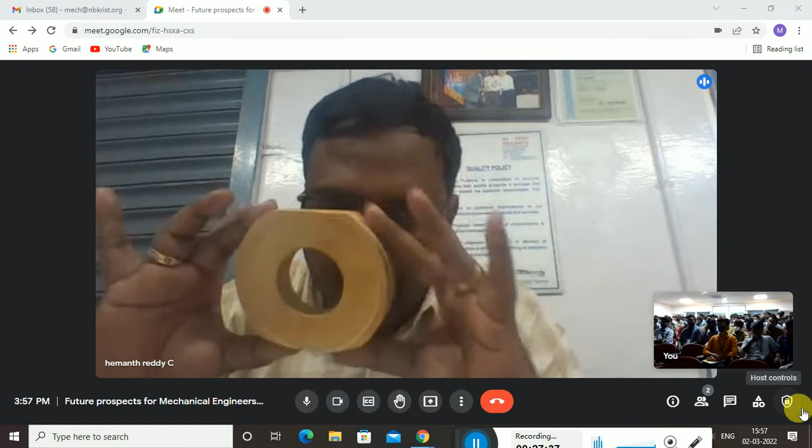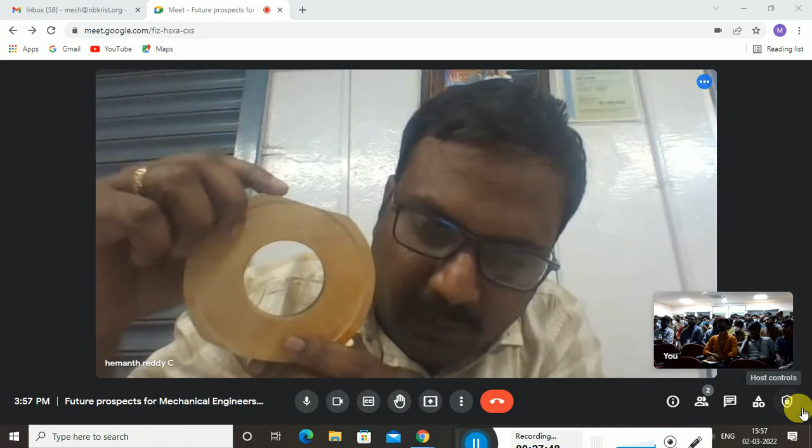This is an ablative ring which will go into a nozzle called HS200JM nozzle. This ablative ring is made up of silica. Silica fabric is impregnated with phenolic resin. What we do is form the layers. If you see here, these layers are formed, finally forming a product.

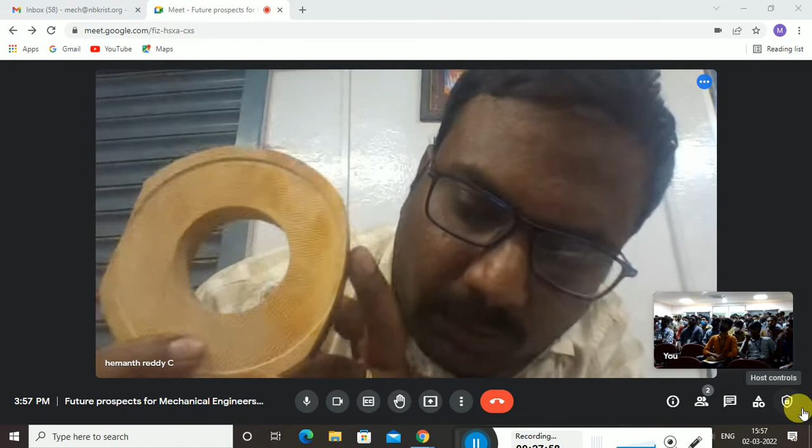Similarly, this is called a silica ablative ring, made up of silica fabric and phenolic resin. Now I will show you another one which is made up of carbon.

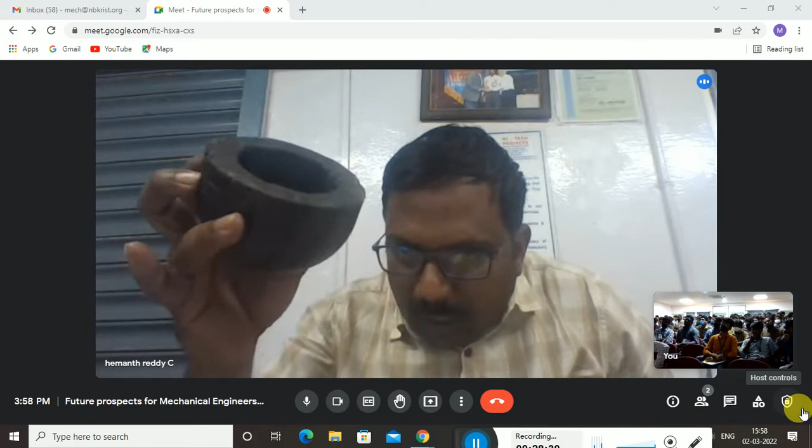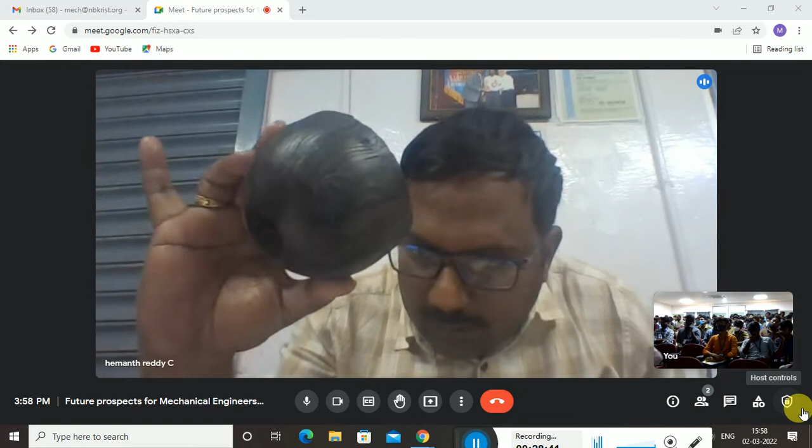You see, this is a carbon liner. Carbon liner, carbon fabric, totally made up of this carbon fabric, impregnated with phenolic resin, and laid on the tool. So we have pressed the male and female mold. This is called matched die molding. I hope you might have learned this tool design.

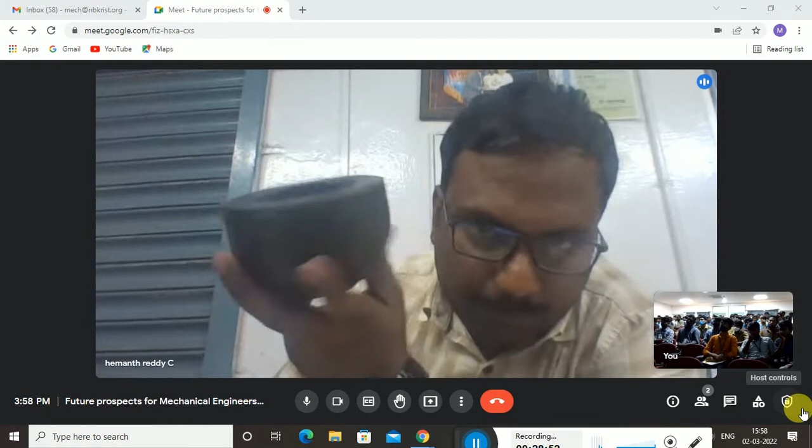So what we do is take it and machine this. Right after machining, we are going to bond it to the metallic hardware. At the same time, I would like to show you the NDT machine which we use for UT test, Sonatest make.

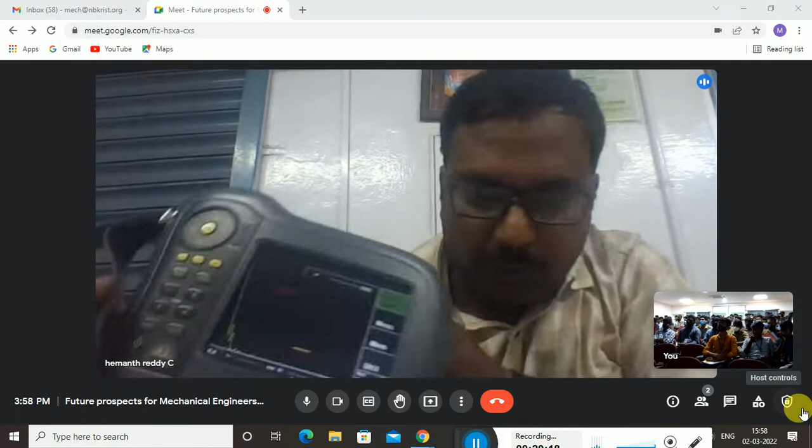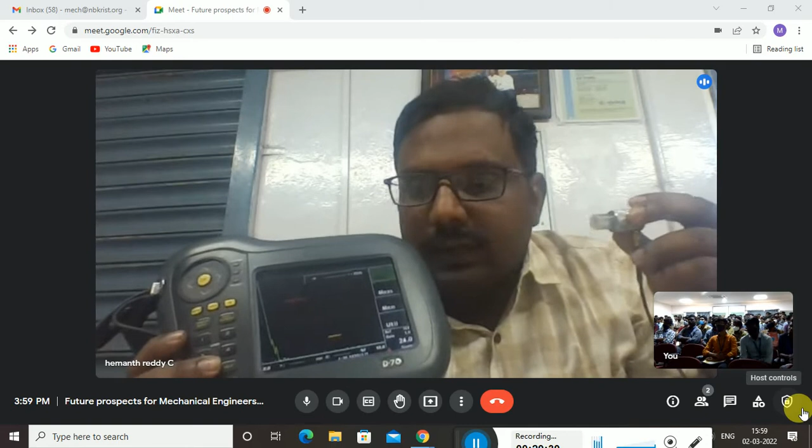If you are able to see, this is a UT machine where our people will find out defects on this liner with the help of probes. Electrical pulses will be converted into sound waves. These sound waves we can see here. In case if any defect is there, these sound waves will not pass. So with this UT machine, we are able to do ultrasonic testing.

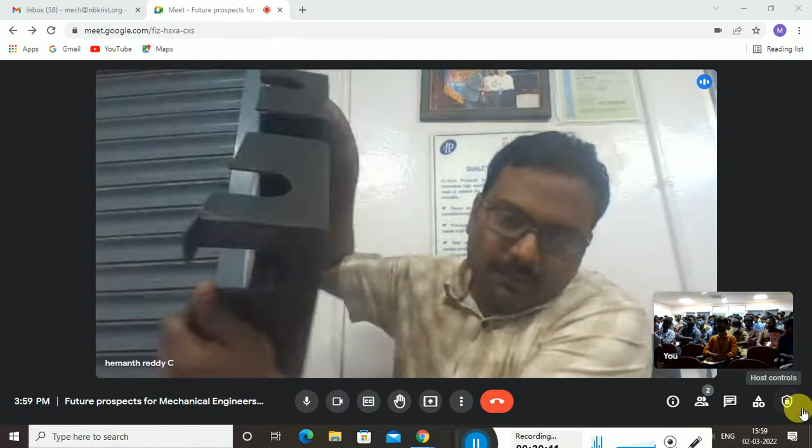This is made up of carbon prepreg, unidirectional prepreg. So, do you know the cost of this? Do you know the cost of this product?

Carbon material cost is 25,000 per square meter. For this, nearly 12 square meters are required. And for processing this, we are charging 2.5 lakh. You count the product cost.

And this is the disadvantage in composites. The cost of the composite material is high. Cost of the composite material is very high. That is the only disadvantage. But a lot of R&D is going on. Slowly, they are going to cut the cost also, and slowly it will be available to all the people.

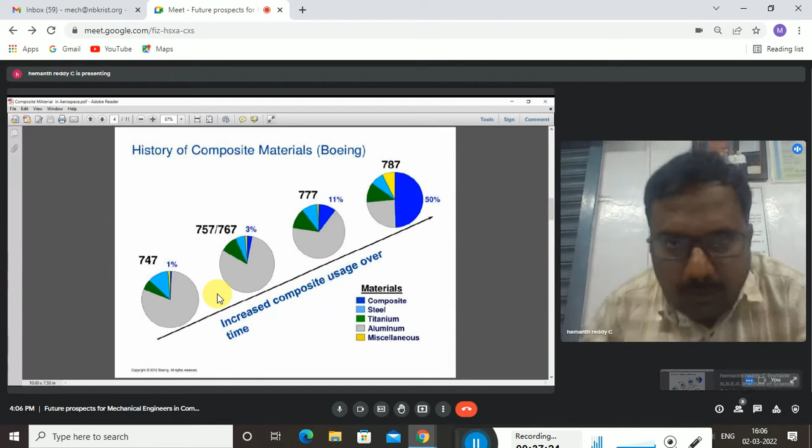Now it is the history of composite material. There is a blue line, the blue color indicating that in 747 only 1% they use.

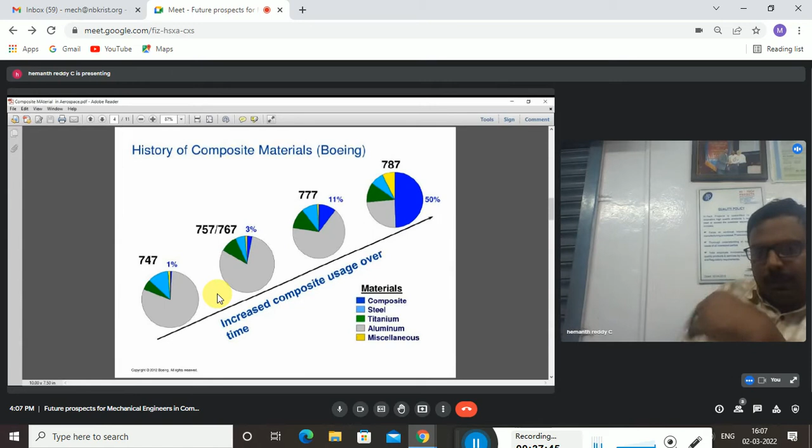So in 757 and 767, it has been slightly increased to 3%. And 777 Boeing, 11%. 787, 50%. So that means the composite usage has increased from the initial perception to right now.

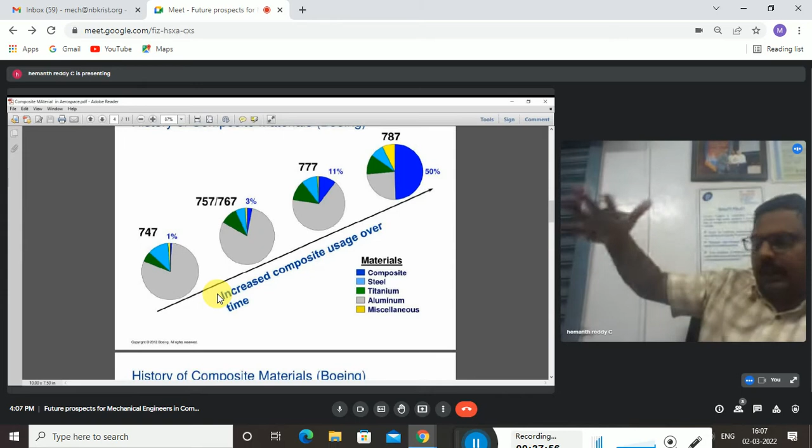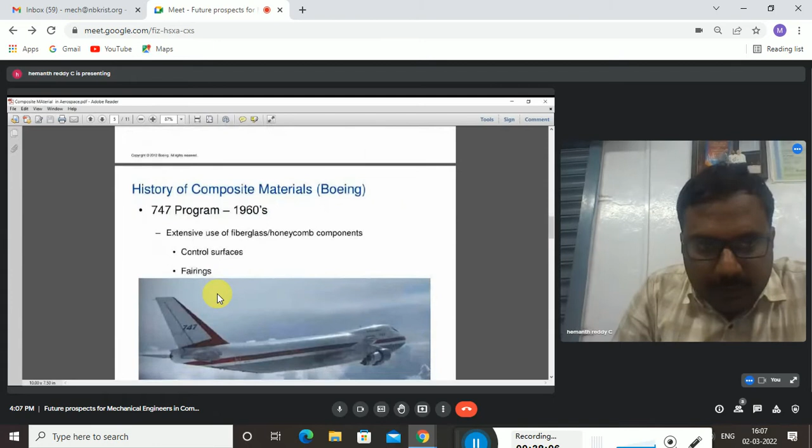And so a lot of R&D is going on to replace the remaining materials with composite also, because of being lightweight. See, in 747, what they used is fiberglass. Here there is a honeycomb material.

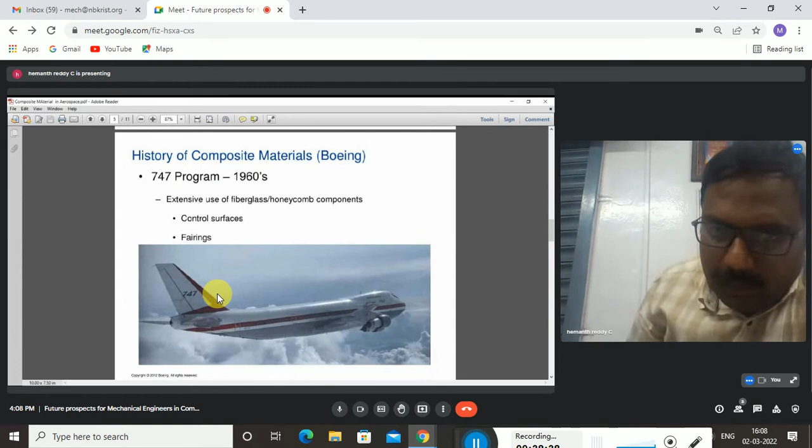Why do we use this? See, there is a sandwich material, sir. I would like to tell everybody that in composite, sandwich material is also available for thickness. What we use for strength is a sandwich material kept in the middle, and the outer layers will be fabric layers. It gives thickness, and also electrical properties are there.

We also manufacture radomes, which are protective covers for the antenna. These radomes, why we use them, is the antenna should be protected because it is exposed to the environment. When it is exposed to the environment, we are protecting it by using these radomes.

When we are placing a cover onto the antenna, it should not disturb its functionality.

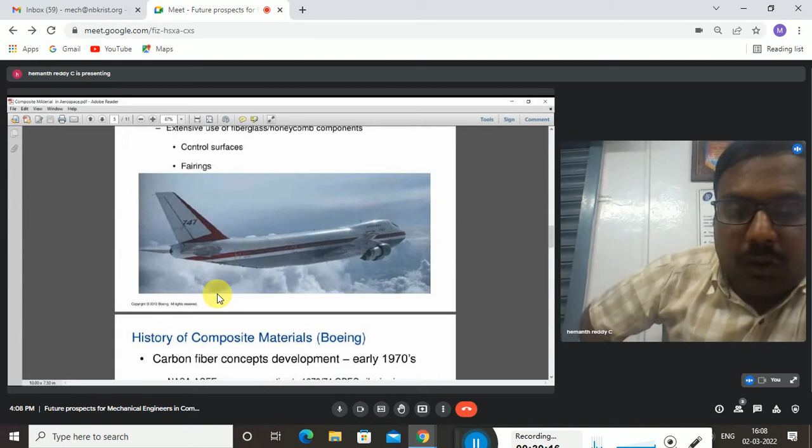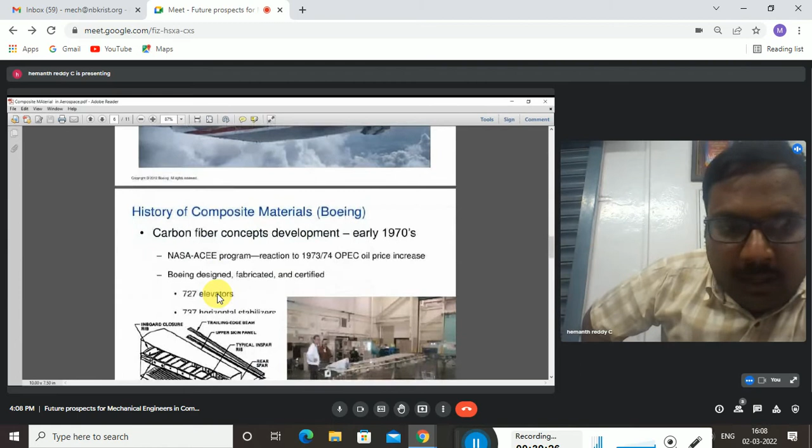So now the carbon composite concept came in the 1970s. Initially, NASA people started it. They started with one program, the ACEE program.

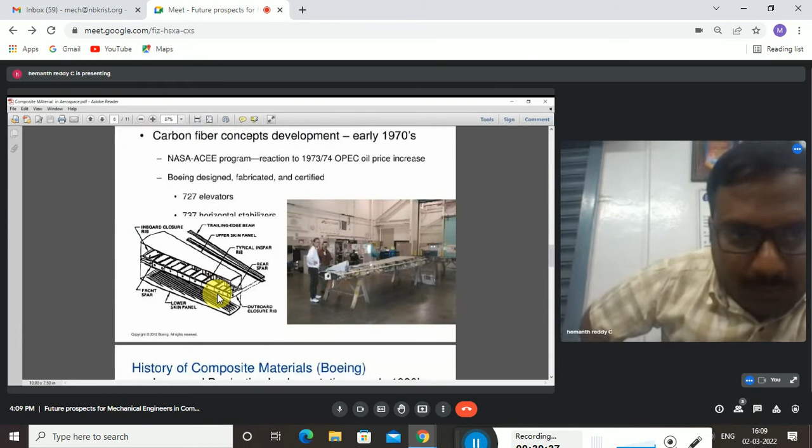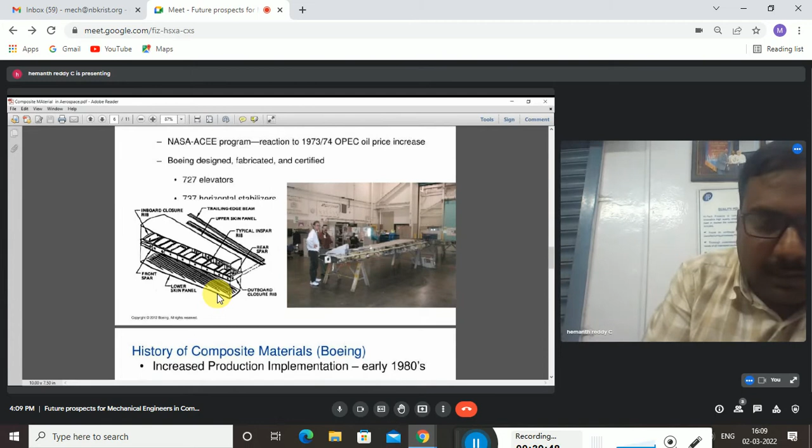So slowly, with the trailing edge beam, upper skin panels, they started manufacturing, replacing the previous fibers, glass fiber, with carbon. And these are all the indications we have given.

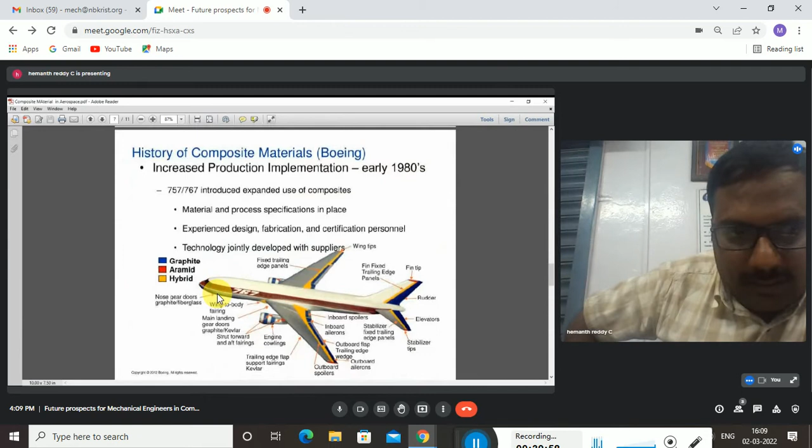And production implementation came in the 1980s for Boeing 757 and 767. Here you can see the parts, engine cowl. Now engine cowlings are totally replaced with carbon.

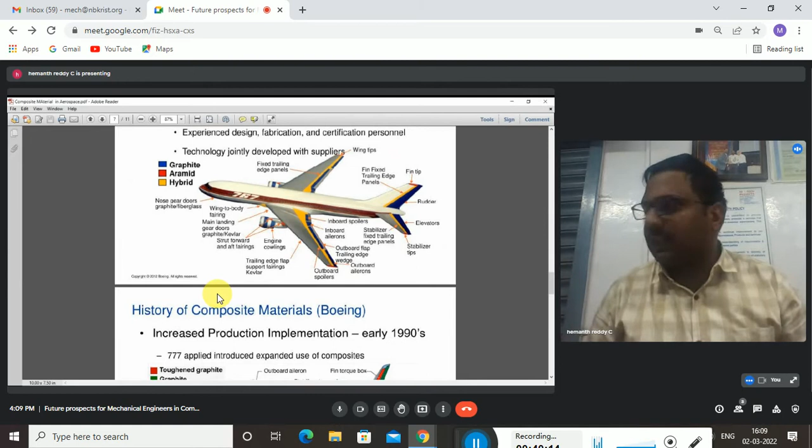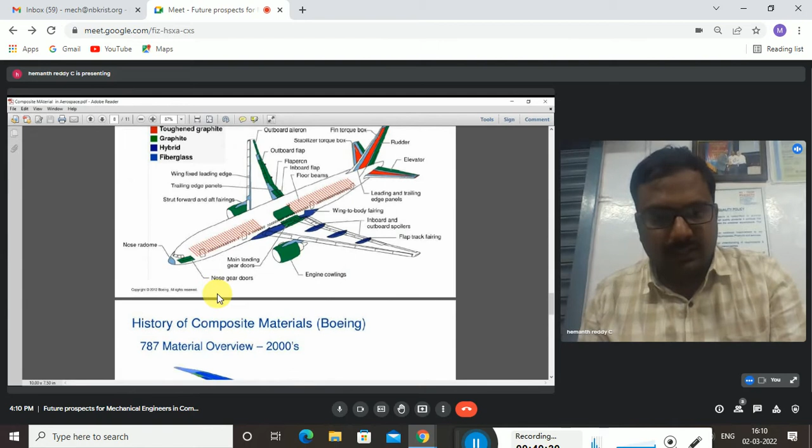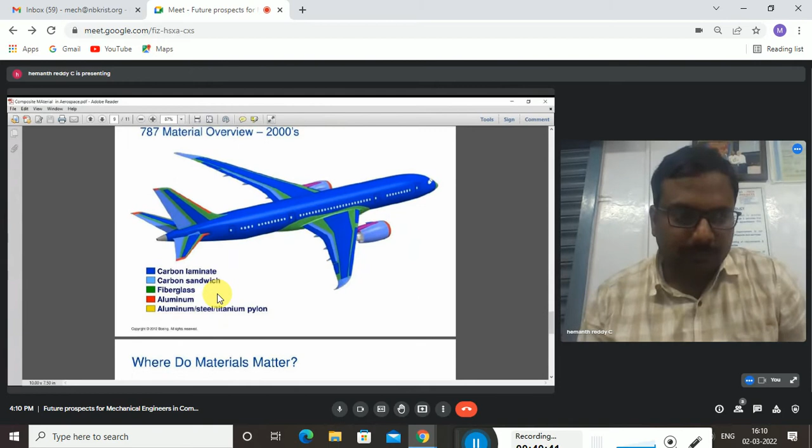So in the 1990s, wherever this green color is there, it's nothing but graphite, whereas hybrid combinations of glass and carbon are also there. So now if you see in 787, this blue color is totally replaced with carbon. You can see here.

See where these materials matter, where we are using them - so everywhere we are using them in aerospace. What is the reason? I will tell you. If you take an aircraft or aeroplane, airframes in the sense wings, related to flying, landing gears, all these things are made up of advanced materials only.

And interiors, now the seats are also totally - seats, overhead bins, linings, bulkheads, cargo restraints, floors, everything are totally replaced with composite because of high strength and less weight.

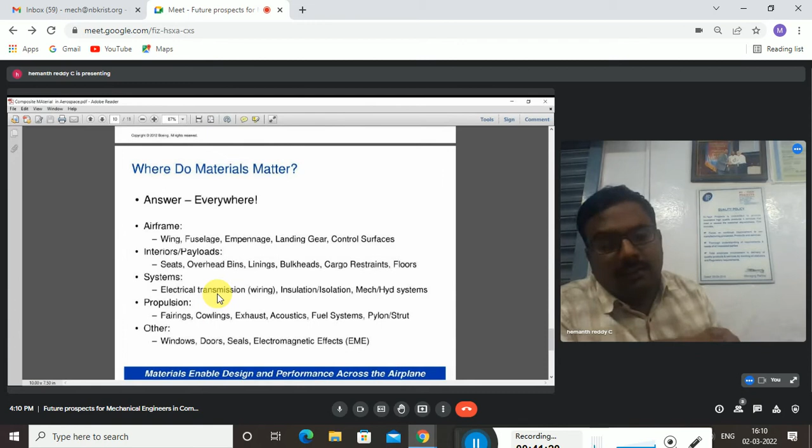And in the propulsion area, I have been telling about fairings, cowlings, exhaust, acoustic. Why do we use carbon material in the propulsion area? What is the reason?

Because propulsion is nothing but oxidant and fuel that it takes. So when we burn that fuel, automatically 1000 degrees or 1500 degrees Celsius temperature will be there. There should be a material to withstand that. If you use metal, what will happen? Automatically at a few hundred degrees Celsius, melting will occur.

But at 1000 degrees Celsius, if you use carbon material, or any advanced composite material, even Kevlar, the melting point will be at higher temperatures. So that's why carbon material or composite material is totally used wherever propulsion is there.

I would like to tell you, 90% of the material in the rocket launch, the composite material only will enter into the launch. The reason behind it is propulsion. 400-ton oxidation will happen.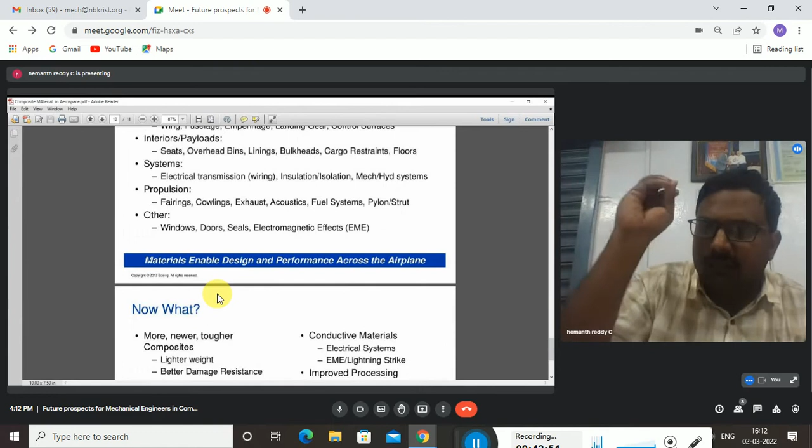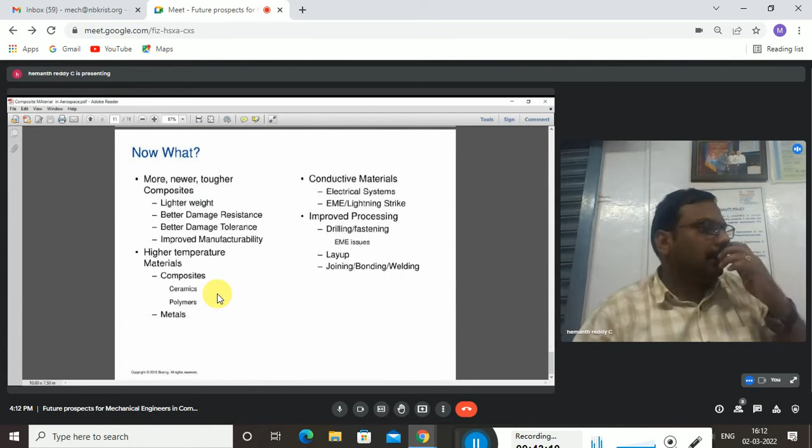So here are the advantages: lighter weight, better damage tolerance, and manufacturability will be improved. It will withstand higher temperatures. Because of all these reasons, this material is used.

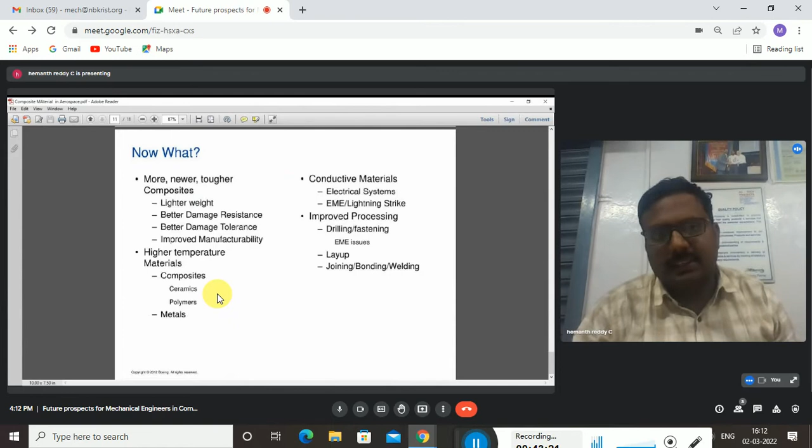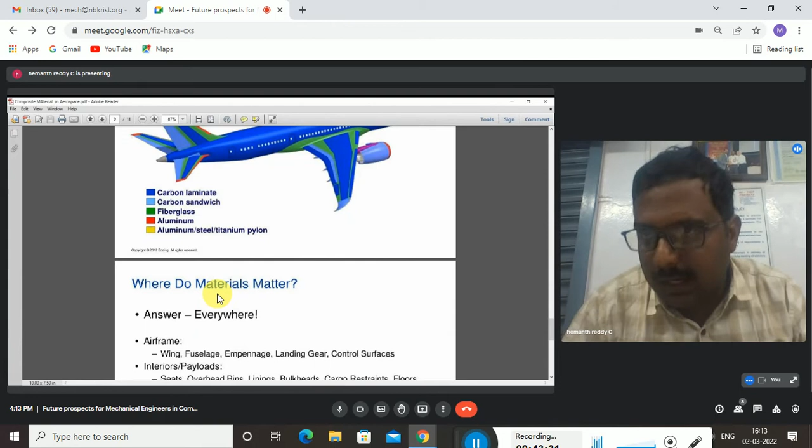And I would like to show one more slide also, what exactly at high tech what we are doing, and what facility we have, that also I would like to show you.

And I would like to show our high tech facility, what we have and what we have supplied.

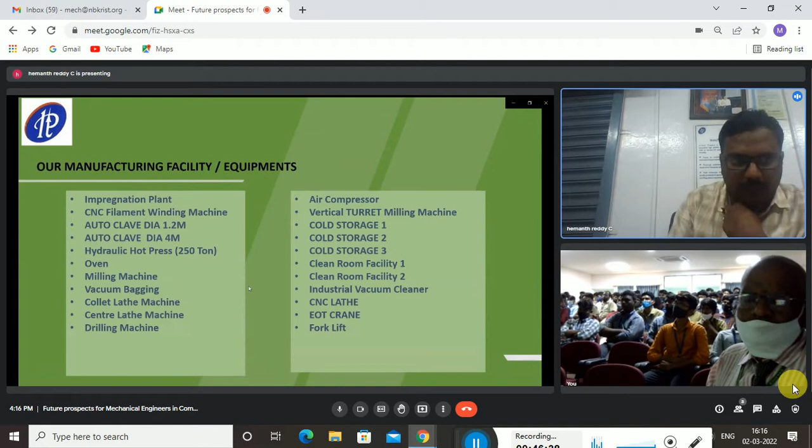Our manufacturing equipment: impregnation plant, we have filament winding, we have autoclave, we have hydraulic press. You can see the plant where we impregnate the carbon and silica fabric with phenolic resin.

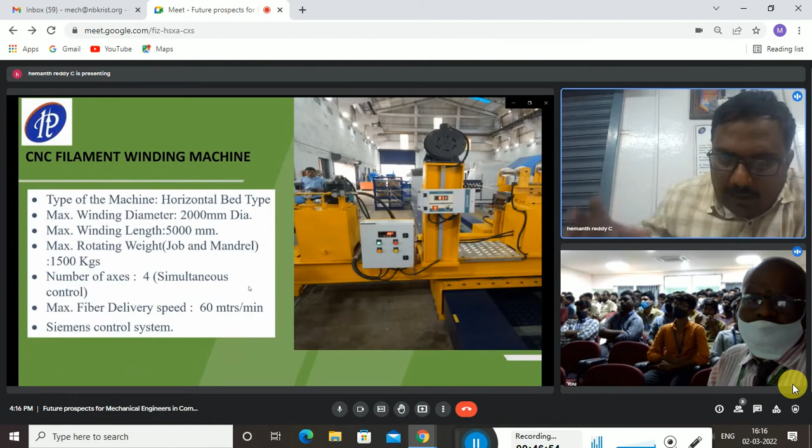And this is the CNC filament winding, as I have been telling, containers, LPG gas containers can be made up by using carbon through filamenting.

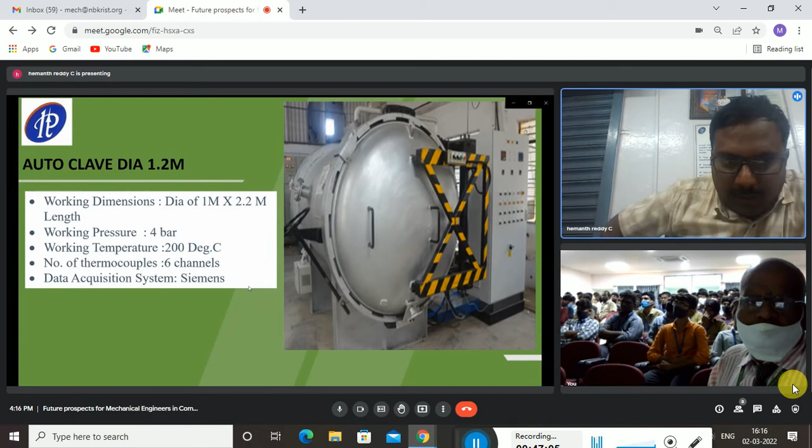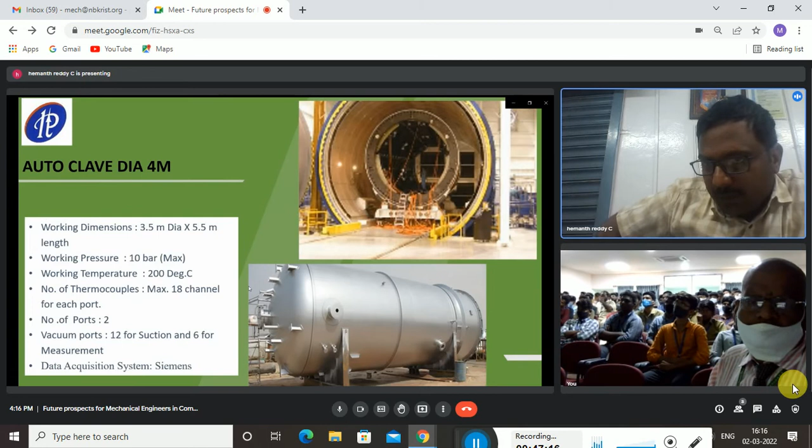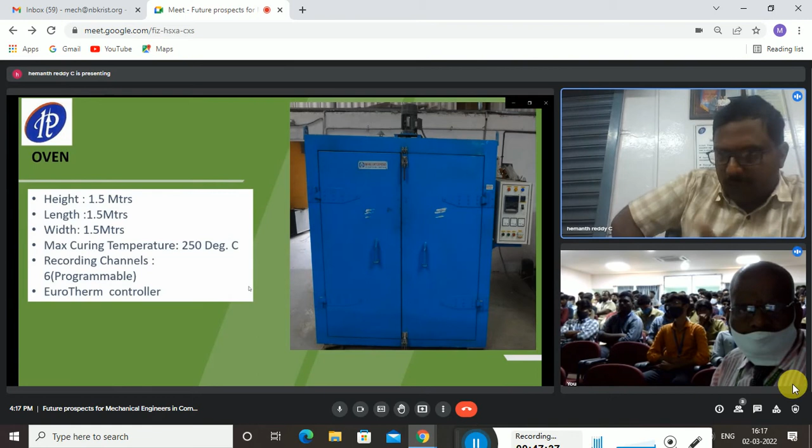And electrical oven. There are few components which can be cured or polymerized at certain temperature without giving pressure. For that, an oven is used. And vacuum bagging, this is how vacuum bagging is placed.

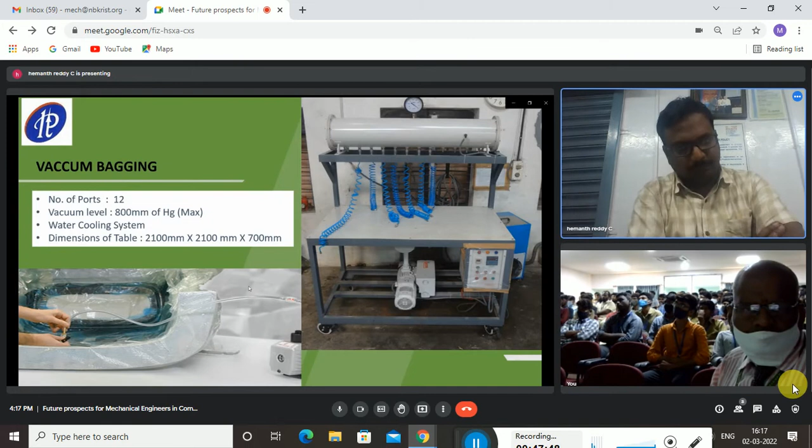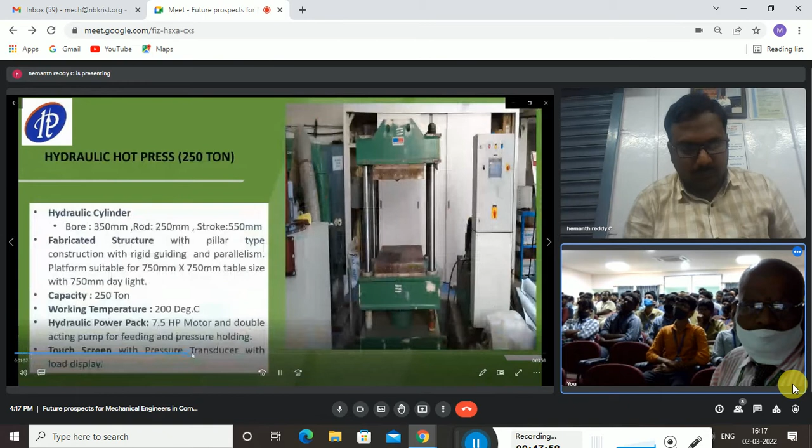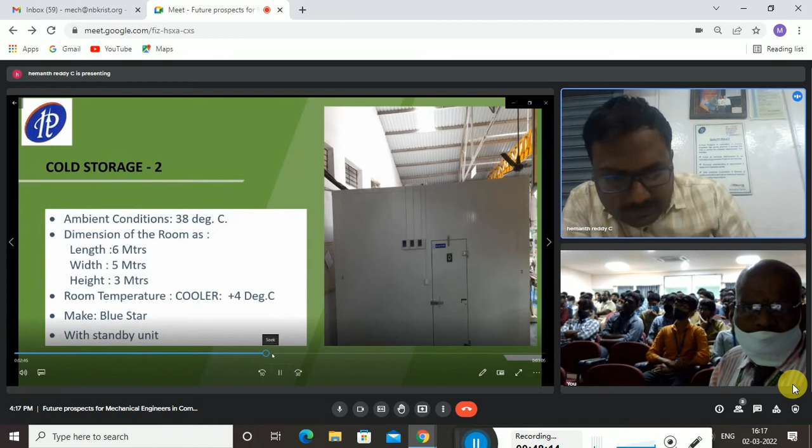And there are some compressors and cold storage. These pre-preg materials should be stored at minus 18, and there are few pre-pregs which we have to store at plus 4. For that, cold storage is required, because all these materials are shelf-life materials.

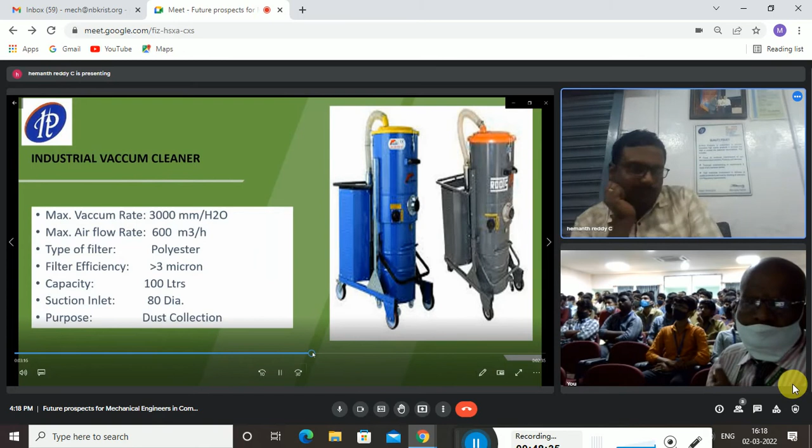I hope you know ASTM standards. Based on those standards, we are able to test tension, compression, flexural, shear test. All these tests we are able to do. It's a UK based machine.

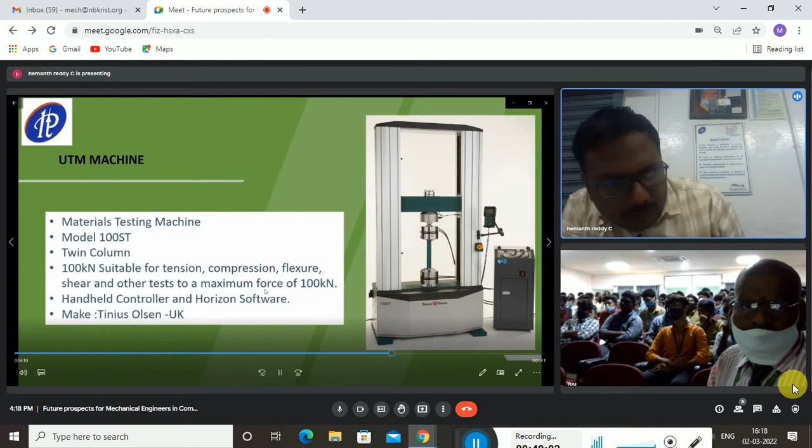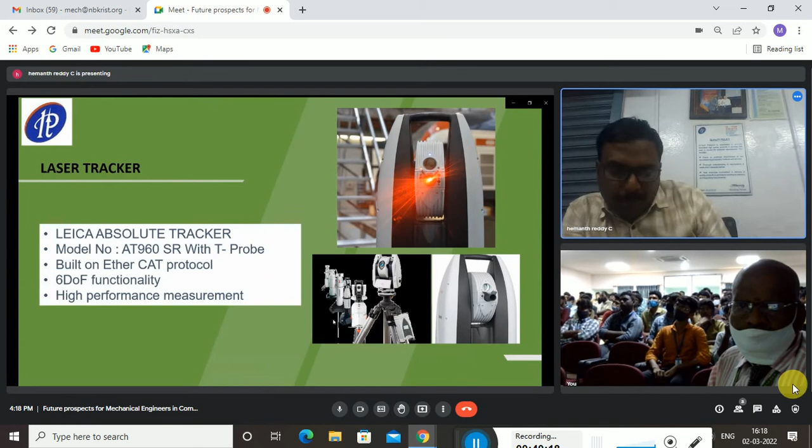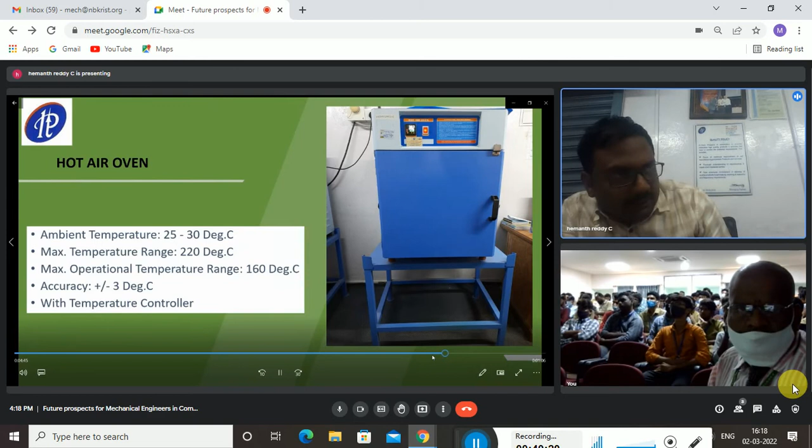And we have few facilities to test the viscosity, muffle furnace to test the samples, small hot air oven, and there is a big Brookfield viscometer.

This is what we are having actually for processing all the composites, whatever we explained. So my sincere advice to all the people who are sitting in the conference hall, especially to the students: a lot of scope is there. The only thing is you should go and research on composite materials and you should know the opportunities.

See, from this I can tell you one point: if you want to learn non-destructive testing, you can learn it. From this, you are able to find the defects. And if you want to test the material properties, then you can start learning how to operate the UTM. All basic things you can start. Mechanical testing, universal testing machine means what? How mechanical testing will be followed, and the ASTM standards. So if you want to test, what are all the methods for flexural modulus? You find out the ASTM methods. So you can explore in that aspect.

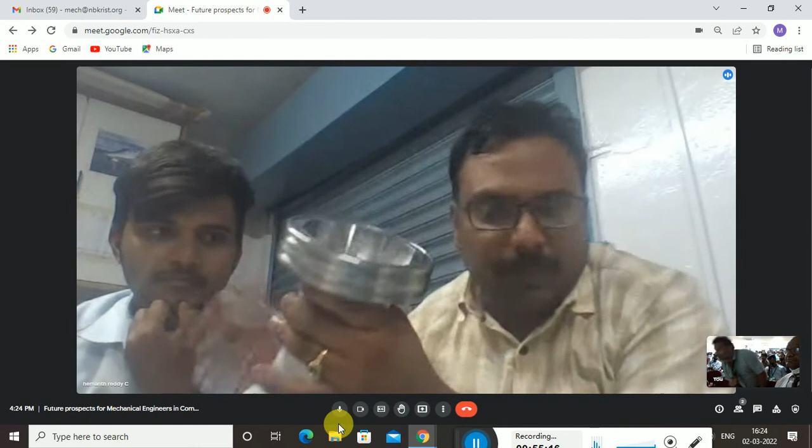Recently we supplied, now we are working for the Gaganyaan mission. Out of five varieties of nozzles, we have developed three varieties, the fourth one is under development, and the fifth one is in-house made. You can see this is one nozzle. It's a high pitch motor nozzle, metallic hardware. You can see this is the metallic hardware.

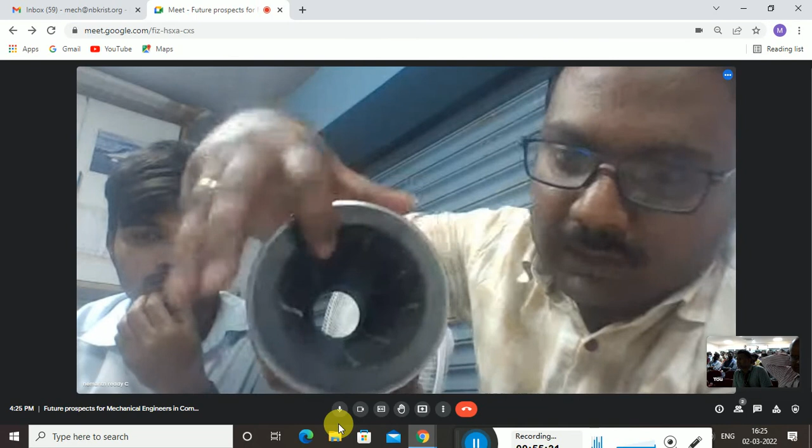So the divergent liner is bonded to this. It's carbon fabric impregnated with phenolic resin. You can see here, this is bonded with araldite. Like that, one more liner is also bonded. Two liners. Like this, we will be bonding all the liners and do final machining. After final machining, we will be supplying to VSSC. This is one nozzle which will go into the Gaganyaan mission.